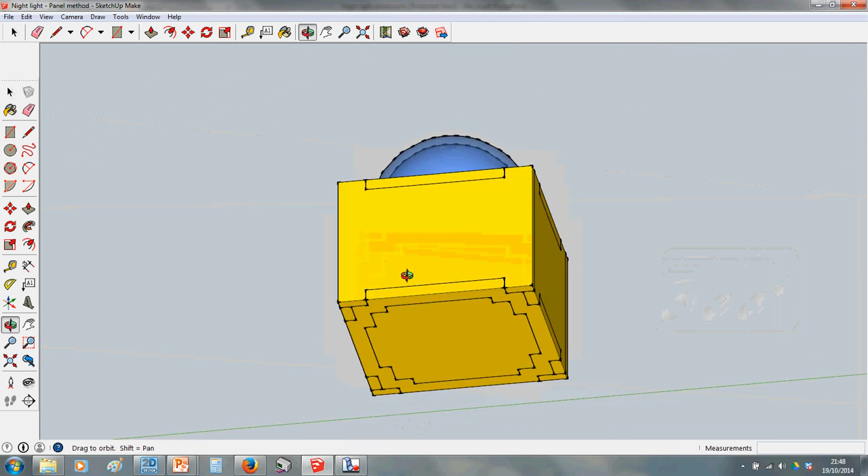Hello Year 9. This video is going to show you how to make the nightlight project in 3D in a program called Google Sketchup, which is quite easy to use for designing ideas in electronic products. It's not the most impressive bit of software and it can be a bit frustrating at times, but it's really good for doing simple ideas like this and getting your point across.

So anyway, we're going to build this, and if you can build everything that I've done on this model, you'll get an A grade for this assignment.

So I'm expecting basically each panel to be made separately, so your sides, the top panel, the dome. I'm expecting it to have LEDs inside. It should be that detailed that you can, for instance, just temporarily remove the side panel, and I should be able to see inside and check that a battery and a standard circuit board and LEDs will all fit in there. You've got holes for the LEDs.

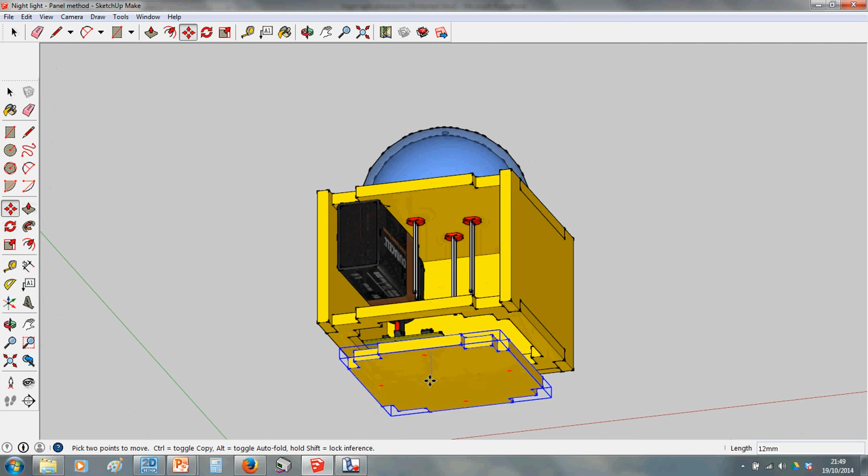Things like this panel here, which is the base, you should be able to remove it so you can imagine what it would look like and prove that you've got enough access space. So it really is a proper model. You can see all the little notches where all the panels are going to slot together for extra strength. This is what we're building.

Okay, so if you can do all of that, take the screenshots and put it on a page and hand it in. If you've done everything, you'll get an A star for it. Easy. Okay, your first job, you're going to need to go and load up a file to help you.

It's this PowerPoint here. Now you'll find that on the student drive. I'm at home recording this, but student drive is M drive. So if you look at what my mouse is pointing at, go M drive, Tech, then Mr Winter, then Year 9 Electronics, Year 9 Nightlight Project, 3D CAD lessons, and then load up this one called Nightlight Dimensions, which will give you a PowerPoint that looks like that.

Okay, this has got all the sizes of all the parts on it, and I'm going to be referring to this when I make the model, so make sure you've got this loaded. It'll make your life easier.

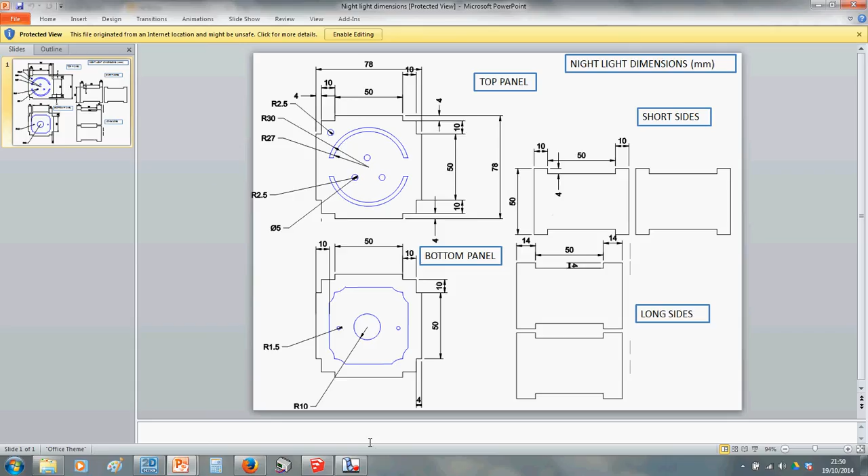Okay, I've just got to pause the video because my dinner's finished cooking, and I'll be back in what appears like no time whatsoever.

Alright then, yeah, had my dinner.

So you need to load up Google Sketchup first, and you'll find that it has an icon that looks a bit like this. It might not say 2014, and your version at school might be slightly different, but it's basically the same. It hasn't changed a lot. So load up the program.

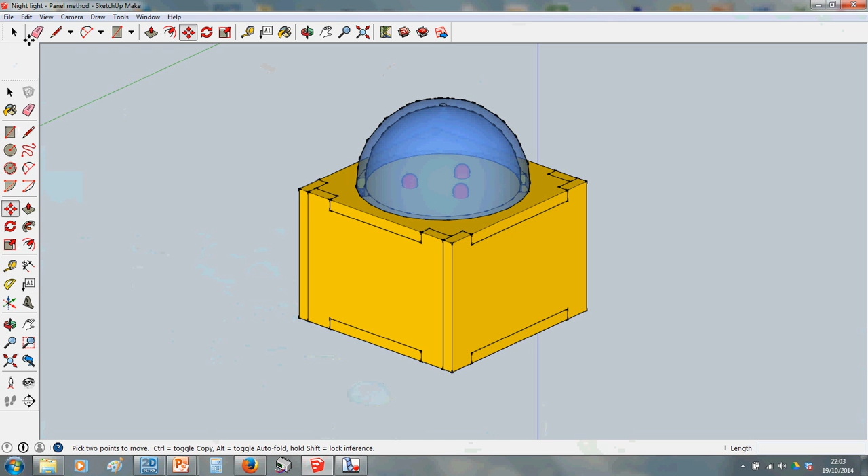I'm just going to close this down so I can load it again and show you, because you've got to set up something in a particular way. So when you load it, you should get a screen similar to this. Click Start using SketchUp.

And actually on yours, if it's the first time you've done it, you'll need to choose a template. So rather than click Start, go to Template, click the little arrow, and choose Architectural Design Millimeters, anything that's got millimeters in the title. Just don't choose feet and inches or meters. Make sure that's your template and click Start using.

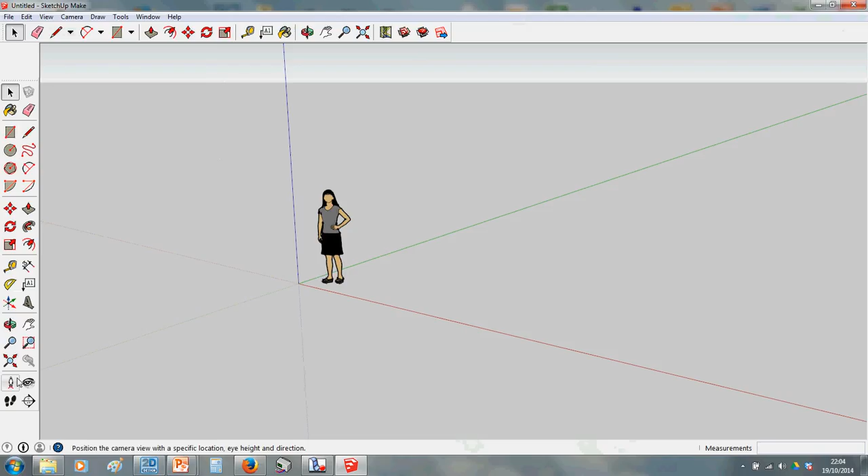Right, yours will look a little bit different to mine. Yours will not have the large tool set, so you need to go and get that first. So you go View, Toolbars, and just tick Large Tool Set. There's a few tools on there that we're going to use today that aren't always there.

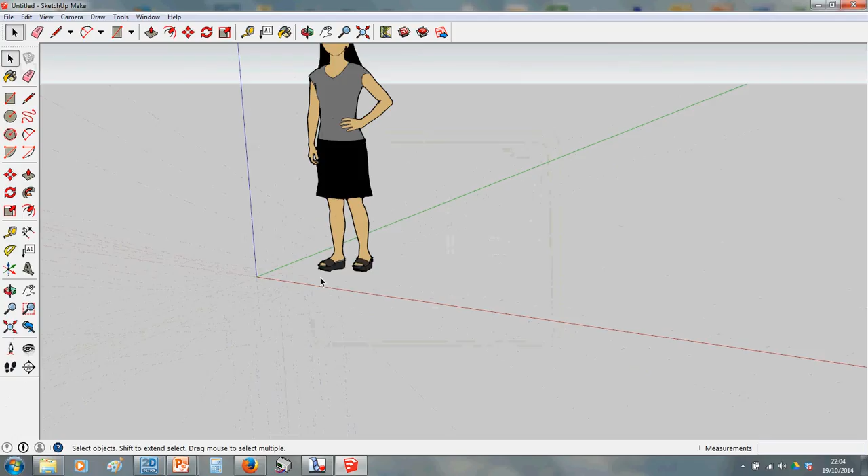Right, everything here is to scale. So this two-dimensional woman is supposed to represent an actual size human being. So obviously when we draw our nightlight, it should be quite small compared to her. It should be the size of, sort of, fit in a hand kind of size. Anyway, I'm going to delete that woman because she's annoying.

So all I did was use the arrow tool, click her, and press delete on your keyboard, and she's gone. We're going to start by drawing, let's start by making the top panel, okay? And I'll show you the cleverness of SketchUp here.

Our top panel measures 78 by 78 square, if we look at our dimensions. I'm going to draw that to start with, and I'll put in the little notches in a minute. So get your square tool.

We're going to try and draw it flat, on the plane that is the red and green axis. If you look in the bottom right, you'll see the dimensions. You could spend ages trying to get them both to say 78, 78, or it's easier to just type 78, comma, 78, and hit enter, and that will draw you an actual size box. Now you'll need to zoom in.

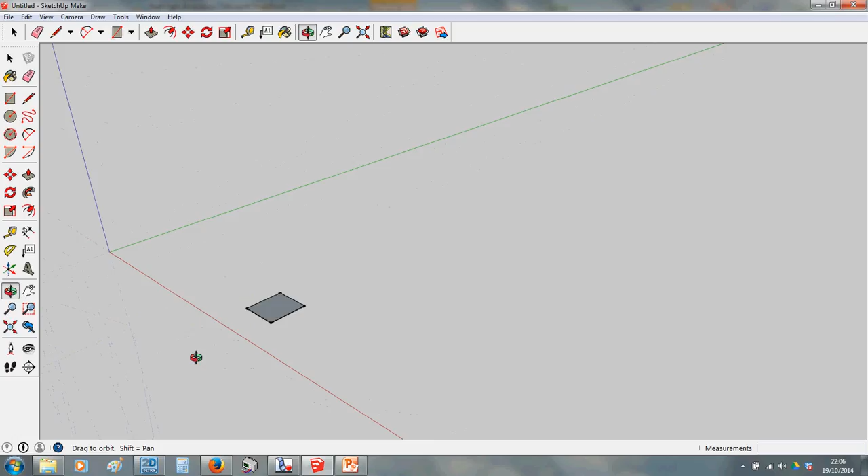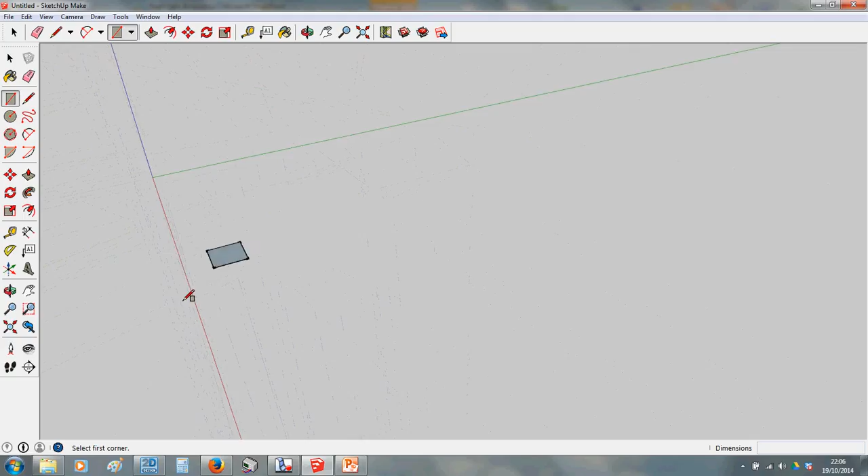To zoom in, scroll the middle wheel on your mouse button, like so. A few pointers on how to maneuver around: if you click the middle mouse button in and hold it, you can rotate around in 3D like I'm doing here. If while you do that you hold shift, you can pan, dragging your view left and right. You can rotate, pan and zoom in and out until you've got everything you need. If you accidentally lose your work, there's a zoom extents tool over here - click that and it will zoom straight back in so whatever you've drawn fills up the entire view.

Okay, I'll show you the rest of it. The next thing we're going to do is make this three-dimensional. It doesn't show you very obviously here, but the plywood we use is 4mm thick, so every panel we make - all six of these - is going to be 4mm deep.

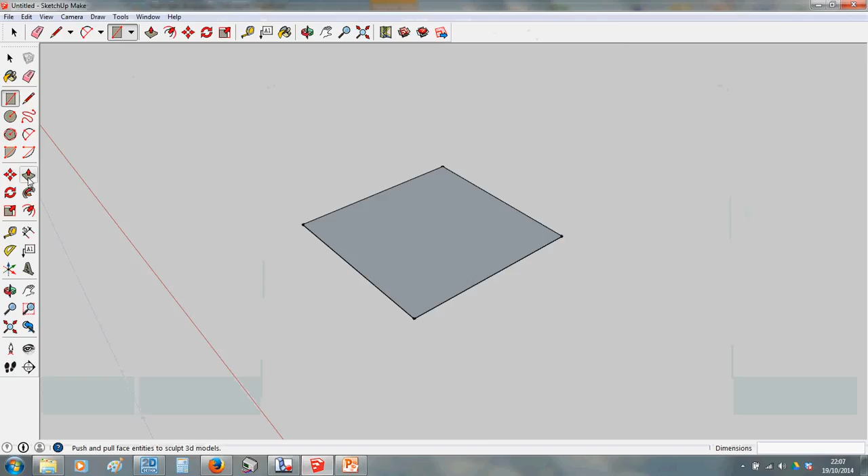This is where a very clever tool in SketchUp comes in - it's called Push/Pull. It's up here too, just duplicated. Select that tool and click and drag up - you can see we turn this box 3D. We can drag upwards or downwards and see our distance down here. We want it 4, so let go of your mouse, type 4 on the keyboard, and hit enter, and that will make you your first panel.

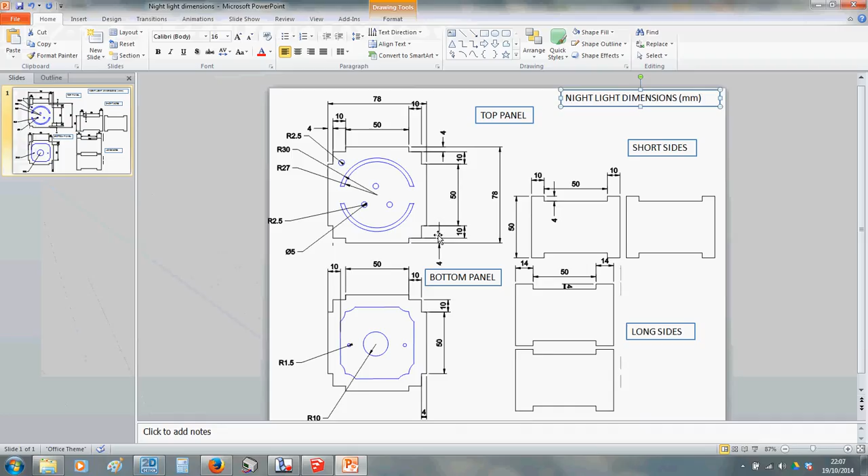Now we've got to put in all these other bits. We've got some cutouts - 4mm here and then another 10, so we've got a rectangle that's effectively 14 deep by 4 thick. I'm going to try and draw these onto the model now, starting with my rectangle tool.

I'm going to start from here. You can see these little blobs that appear to show you when you're on the corner. Click, and I'll draw out a rectangle - it needs to be 14 by 4. Hit enter, and we've drawn that.

I'm going to do the same from every corner now - one going this way, 14 by 4, making sure they're pointing the same way. That one coming in, 14 by 4, and the same here. Just draw them a bit bigger than you need, then type in your dimensions, 14 by 4.

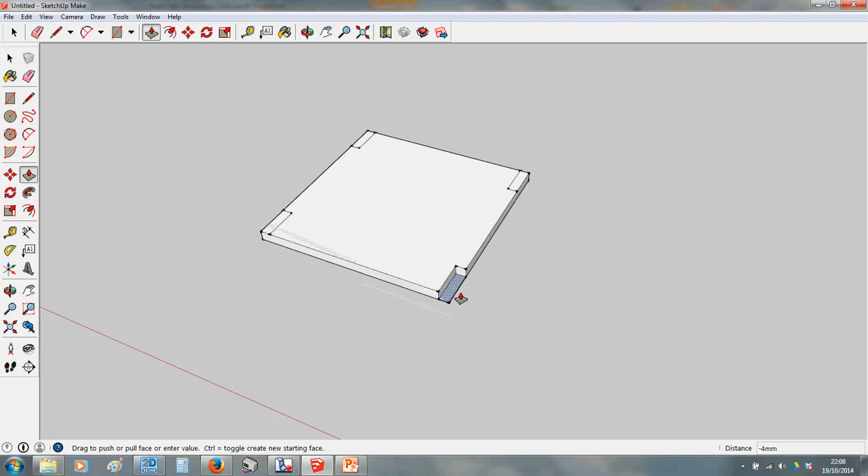Another clever use of SketchUp: if we get our push-pull tool, we can take that bit and pull it down, and if you pull so your mouse moves to the very bottom edge and let go, it will wipe out that bit entirely. Do it again for each corner.

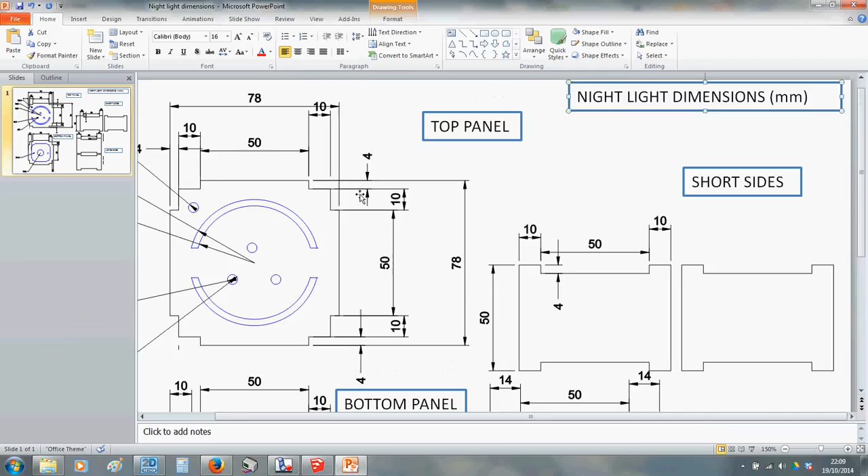So we've made that cutout here, but we've now got a smaller cutout of 10mm next to it. Basically we've got this whole corner - it should be 14 by 14, but 4 thick. I hope that's not too confusing for you.

Now I'm going to make a rectangle from here in - make sure you're drawing it on the top. Notice, if you're looking from the side, the rectangles sometimes get drawn sideways or other odd ways, so adjust your view so you're looking top down. Make sure your rectangle is appearing how you imagine, and we want it 10 by 4.

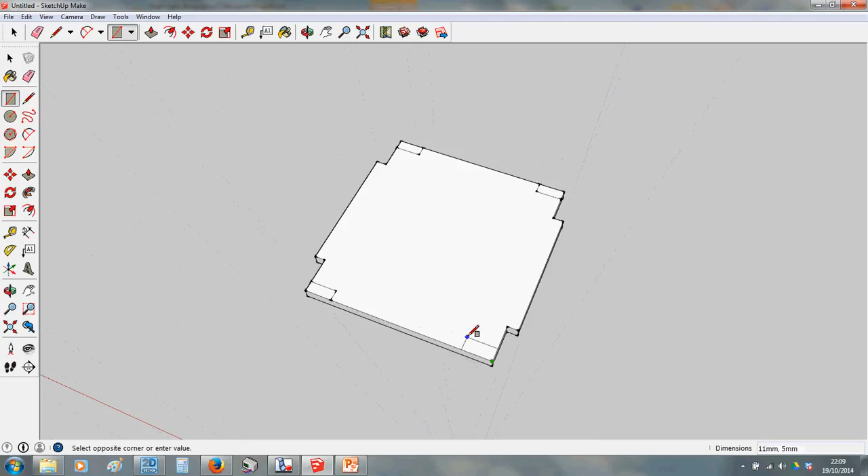Same this way, 10 by 4, and then... the good news is this first panel is probably the most complicated one, apart from the dome, but we won't talk about that yet.

Right, now you've got to get rid of these bits, so pull tool, pull that down, there we go, and do that. Good. Right, so this is starting to look a bit like a 3D version of this.

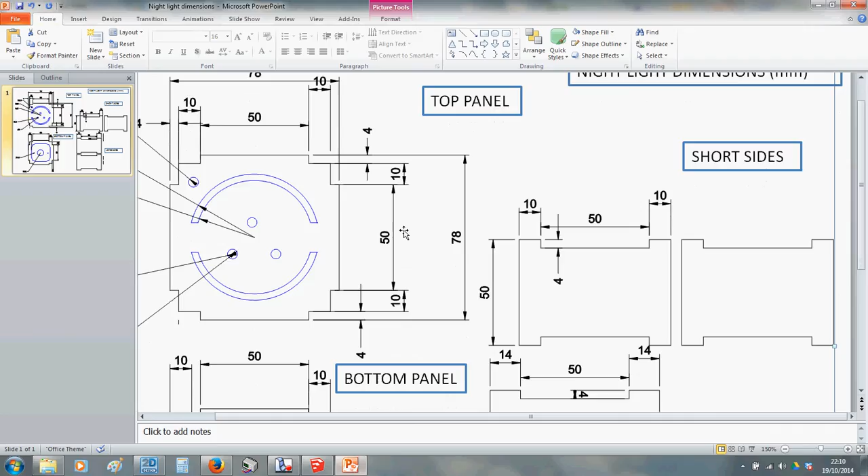Before we carry on, we're going to make this circular bit with these cutouts in it, and these holes for the LEDs and the light dependent resistor that we're going to put in. So I've done these by radius: a circle with a radius of 30 and a circle with a radius of 27. We're going to make this big circle here and then cut these bits out afterwards. So follow my method for this.

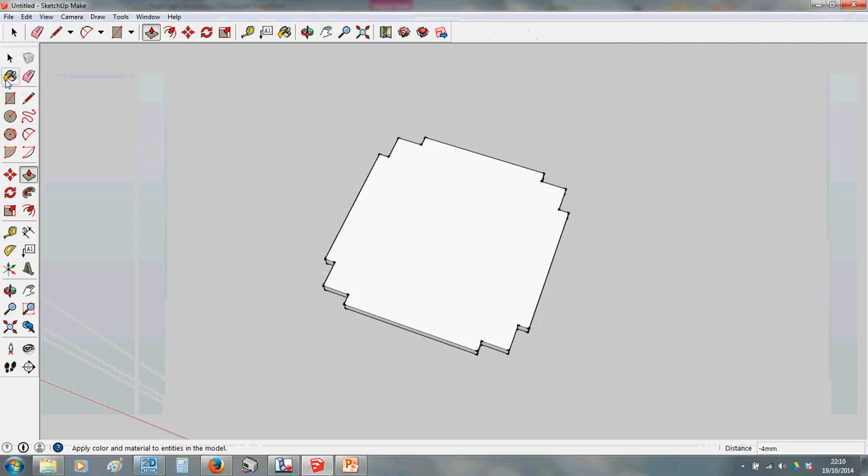We need to draw those circles lined up with the center of this, so we've got to find the center somehow. The easiest way is to get your line tool and draw a line from one corner to the other, and from that corner to the other, and where those lines cross, you should know from maths, that's the center of your square.

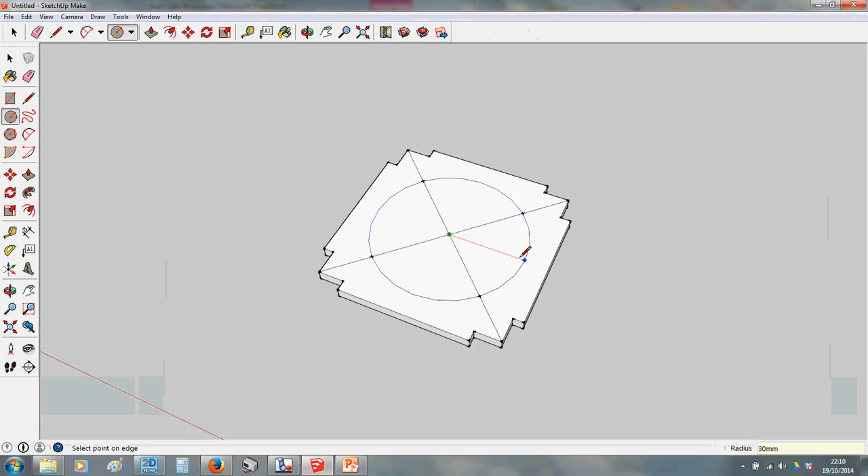Go and get your circle tool, make sure you're in the middle, click, and we wanted this to be 30 radius, so type 30 and hit enter, then draw another circle, type 27 and hit enter. So you should have that pattern now.

Okay, you can now get rid of some of these lines you don't need. For instance, these lines we used to find the center are no longer needed.

If you make a mistake like that, by the way, like I've done—I've chopped the top out—just do Edit, Undo, or Control Z on the keyboard. So to show you that, Control Z undoes it. Always get used to using undo if you make a mistake rather than just carrying on and trying to fix it later, because you only make more work for yourself.

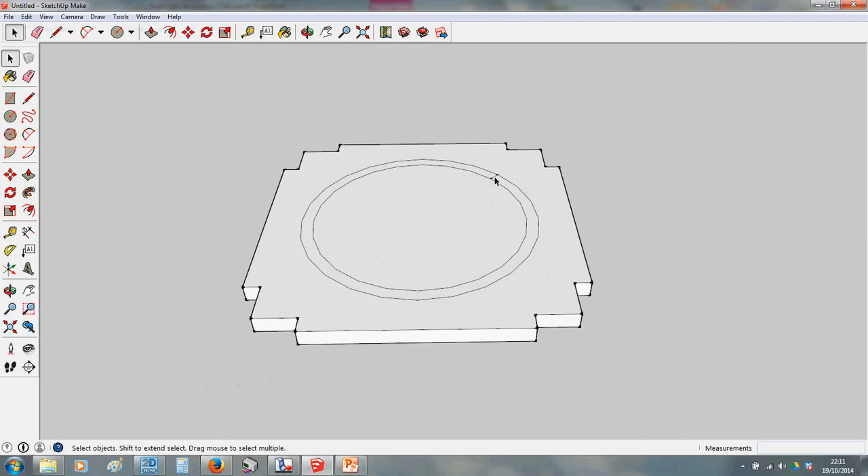Right, so we got that. We've got to now put in a kind of gap here. Now I haven't actually put any dimensions on this, I'm going to say go with maybe 10 millimeters. So this is going to be a bit ad-libbed.

I'm just going to get the line tool and try and make it even. So what I'm going to do is move down here along this side until the little blue blob appears—that means I'm in the middle. So I've got my line.

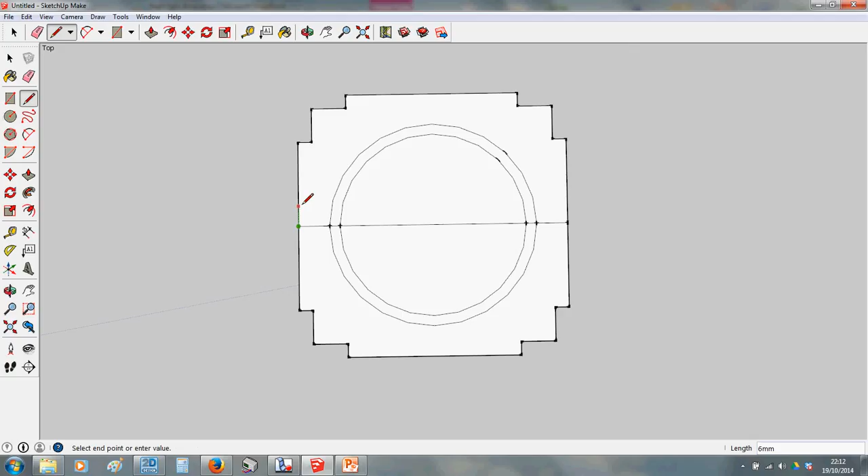Using my line tool, I'm going to make a line and move upwards and make it 5, hit enter. You see I've got a little blob appeared here, and draw all the way across. Then I'm going to do the same coming down—come down 5, there's my blob, draw all the way across, and now I've got my guidelines.

So I've now got to get rid of bits tactfully. Get my arrow tool, and I want to get rid of these lines here. Make sure you're picking the line, by the way, not the face, when you click delete.

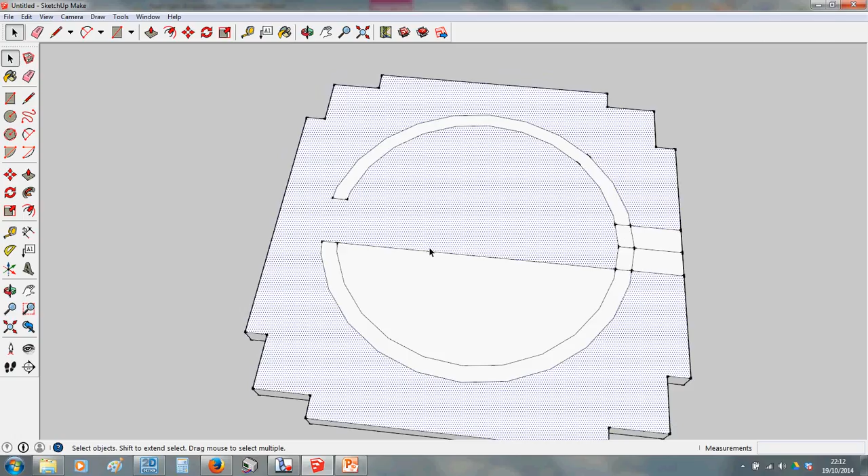This is a bit time consuming, and this is one of the annoying bits of this program. It can be quick for some things and then really frustratingly slow for others. Okay, and then get rid of the extra lines you need.

Brilliant. Right, we want to make those a hole, so that's where the pull tool comes in. You're going to pull downwards. Now you can type -4 if you want and hit enter. Actually that didn't work—you can pull down and just type, or do what I did there: basically pull it down, but then, I know it seems counterintuitive, drag your mouse out sideways until you pick up the edge of the work, and that will pull that face down to the edge, and in doing so will make a hole.

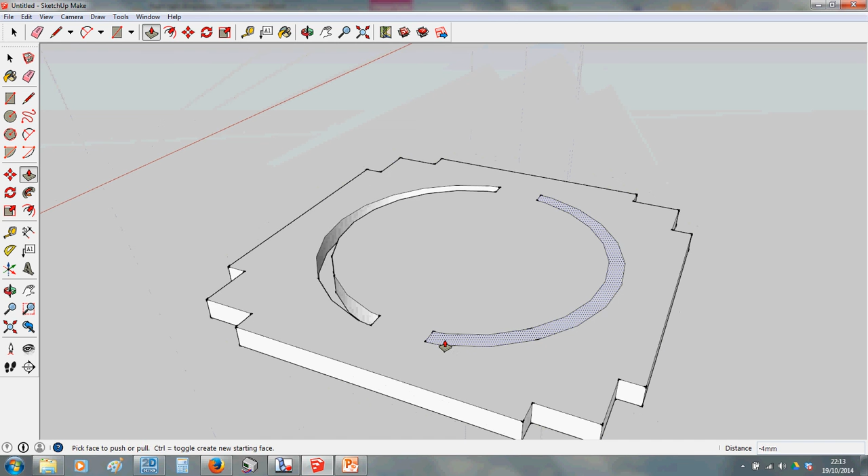Okay, so do the same with this one—pull it down to the bottom edge of the work, and you've made that there. All that's left to do now is you've got 1, 2, 3 holes for your LEDs. I'm not too bothered about how these are spaced because it's up to you so long as they're within the dome, but they are 5mm diameter or 2.5 radius, and then you've got another 2.5 radius hole on the outside, which is for the light dependent resistor, which is going to detect when it's light or dark.

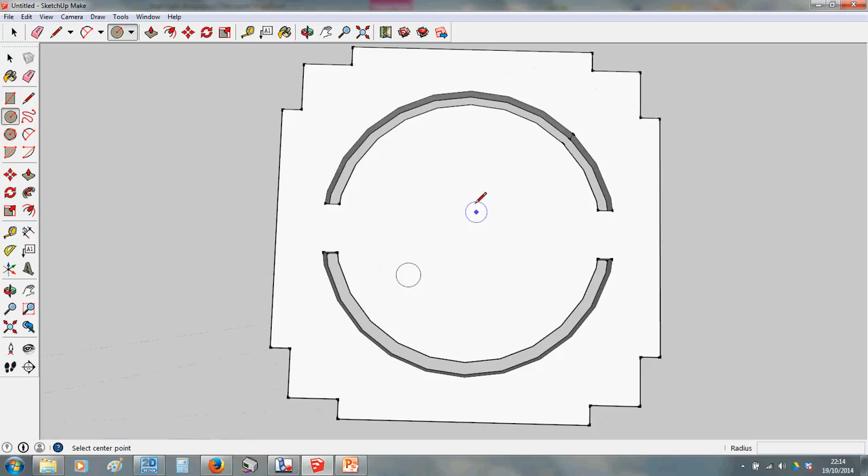No prizes for guessing. Circle tool, click, radius we wanted was 2.5. Let's put one there, I'll try and do it as triangular as I can. 2.5, same again, 2.5, and then another one on the corner here, 2.5. Right, we've got to make all of those holes now, so pull tool, okay, and again pull them down

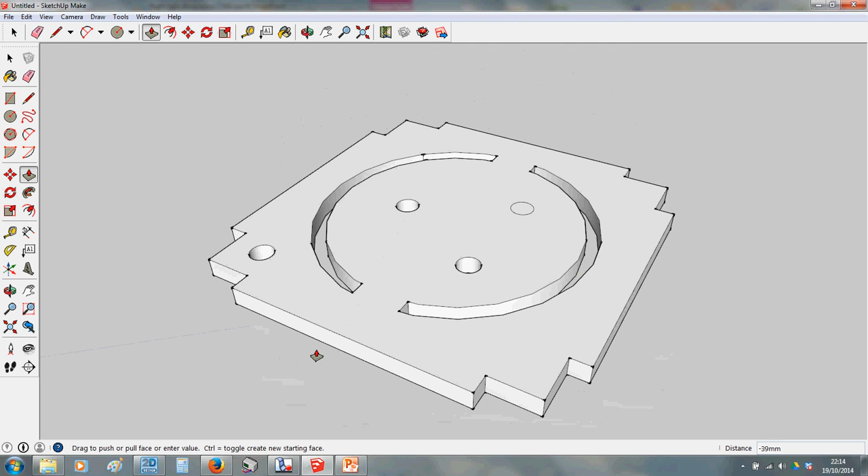To the edge. When you get used to how this pull tool works, it's really powerful. Right, we've made our first panel, if you like. So feel free to have a look around, just check there's no mistakes, no bits missing.

If you were worried about any of the sizes, by the way, and you thought you might have got something wrong, over here is this dimension tool. If you click on an edge and on another edge and pull out, it tells you how big that is. So that's 50. We can check from here to here, for instance, is 10. From here to here, we can confirm is 4. 4, 10, 50. Let's have a look at our plan. 4, 10, 50. Yeah, I know what I'm doing, so of course it's spot on.

Right, delete those dimensions afterwards, by the way, just use them to help you. Right, that panel is finished.

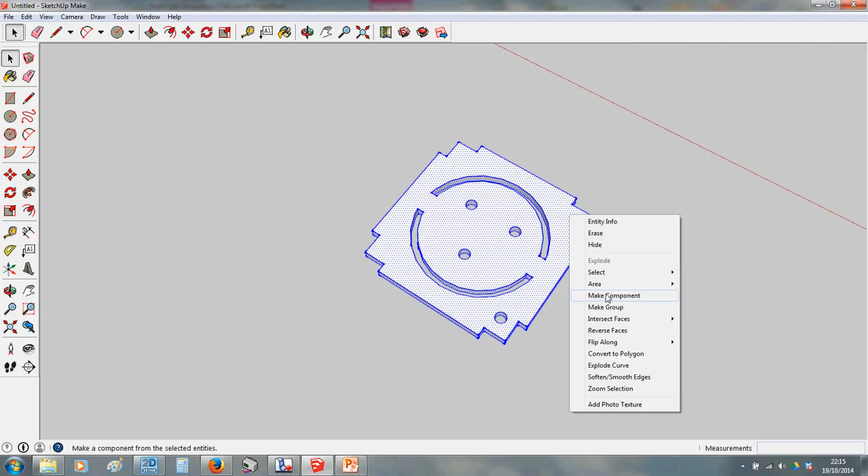So I'm going to do what's called make it a component now. I'm going to get my arrow tool, drag a box around the entire thing, right click on it, right mouse button, and click make components. Okay, so call it what it is, top panel. Okay, and there we go.

Now your next job is to make the side panels, and then we'll make the bottom. We can actually copy and paste this later and use it to make the bottom, because when you look at this you'll see the bottom is essentially the same size, it's just got a different shape in the middle.

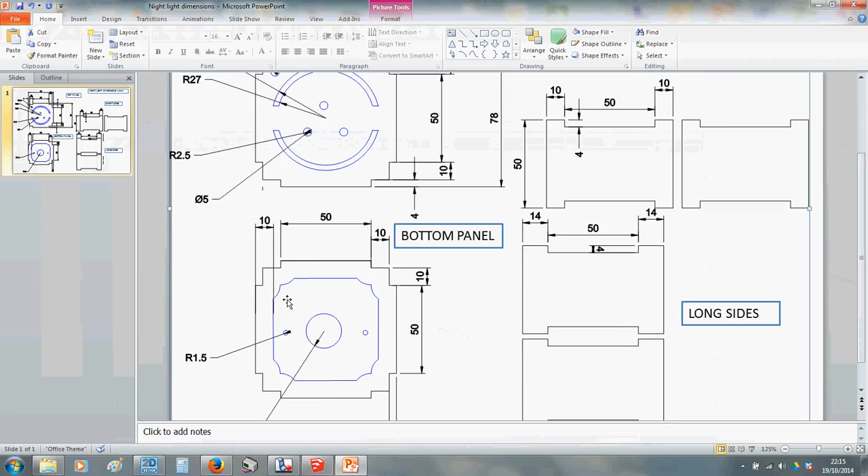So we're going to make the long side, well, let's make the short side panels now. So these are 10 by 50 by 10, and 50 high overall, and they fit, if you can imagine these little teeth here, fit into this little 10mm slot there and there. Okay, so I'm going to make a 10 by 50 by 10 and by 50 high.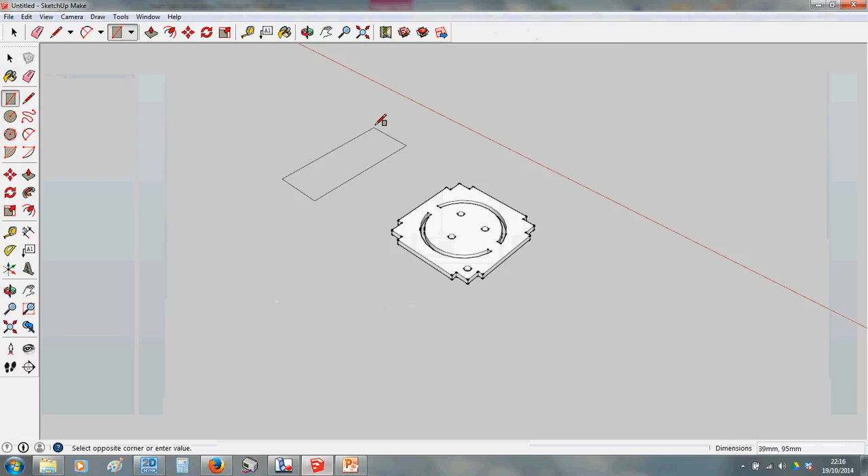So rectangle, 50, 70, and I'm going to pull that up with the pull tool, 4mm, and then I'll do this with the line tool this time. So it was along 10, down 4, along 50, must be up 4, and along 10.

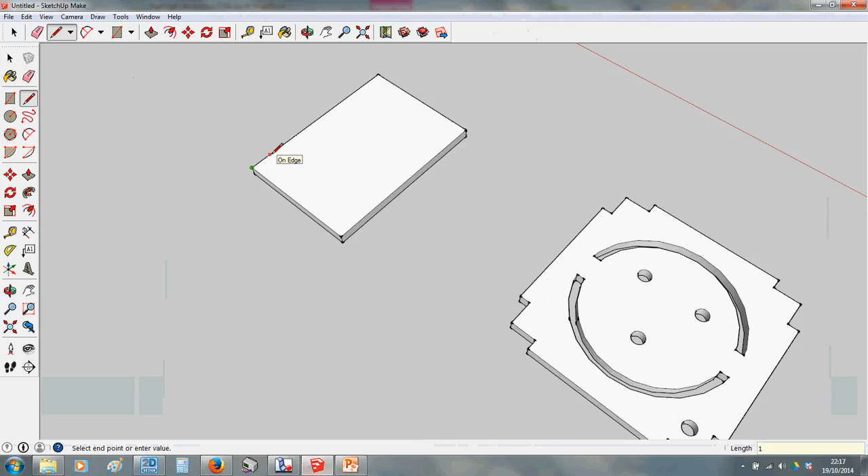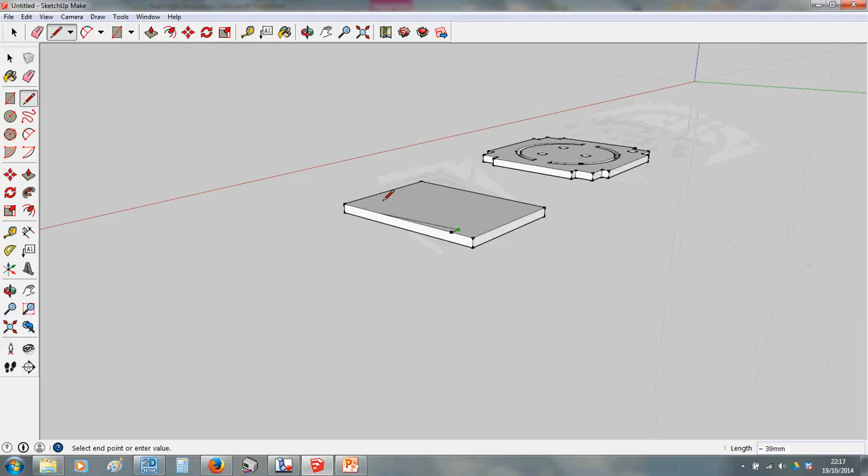That's the exact mirrored on the bottom. So with the line tool, starting from the edge, along 10, hit enter, there's the blob, this way. Notice by the way, it kind of, when it goes red, it's saying you're drawing it parallel to this red axis. Okay, so use the colours of the lines to help you. So we wanted to go 4 that way. This way it goes green, if you have a look, because back there's the green axis, so moving this way is green. Okay, anyway, so going this way 50, and then back in 4.

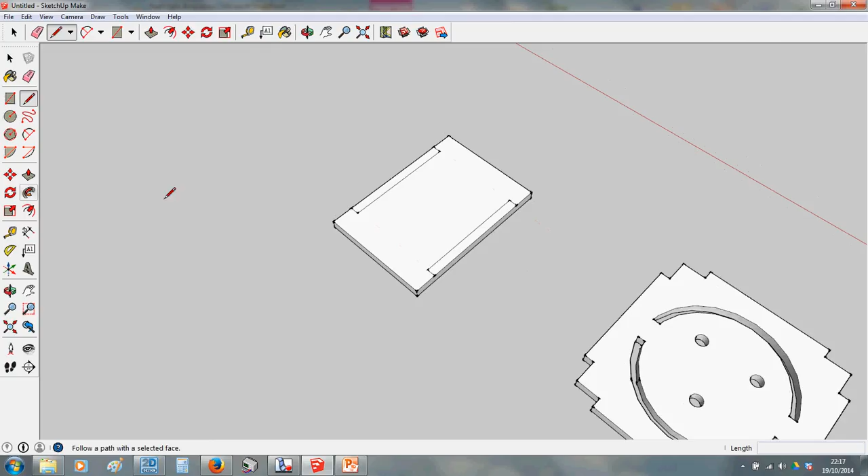And I'll do the same on the bottom, so it was along 10. You'll see it handily, it gives you nice little dotted lines like that to help you line it up. 4, from here to here, there you go. So sometimes you don't even have to type the dimensions, because if there's a mirrored part, it matches it for you. Okay, going to get rid of those bits, so we're going to pull that down to the bottom, pull that down to the bottom, and looking at the plan, that is it.

There's nothing more to that. There are 2 of these, so what we do now is make it a component. So again, drag a box around the whole thing, right click, make component. So this is shorter side, and I'm going to make 2 of them. So I'm going to select it and just do edit, copy, edit, paste.

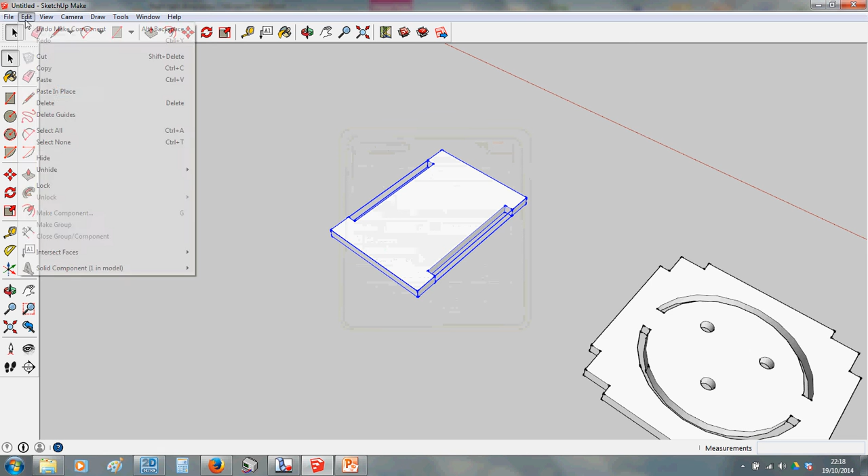Alright, we've got another one. Time for a bit of assembly now. We want to start gluing these together. Now this is where it can get a bit fiddly, you're going to be using a combination of the move tool and the rotate tool.

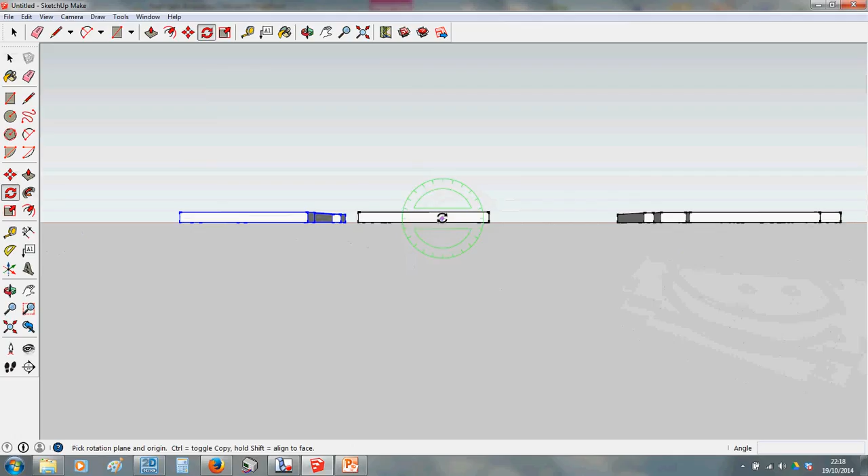The first thing we need to do is rotate this 90 degrees. Get the rotate tool, and we're going to look at it sideways on. Notice your thing should be going green. Choose the one you want to rotate first, get the rotate tool, click on the side, click again, and rotate. It kind of snaps to the normal angles, or you can just type 90 for 90 degrees and it will move it.

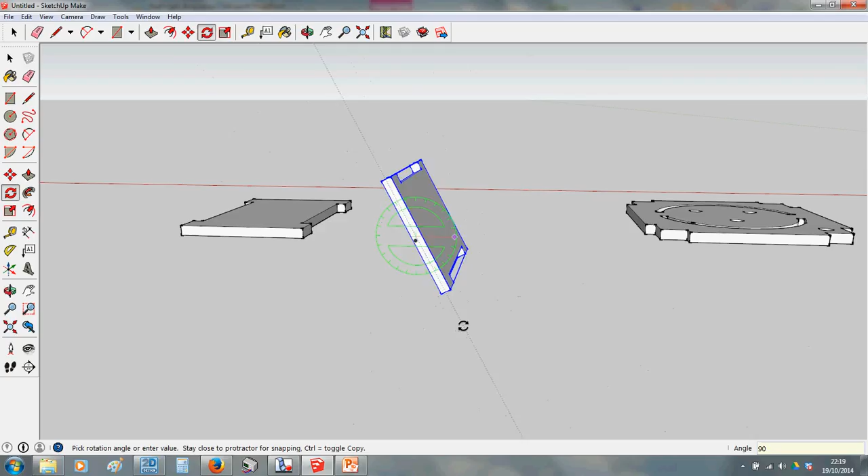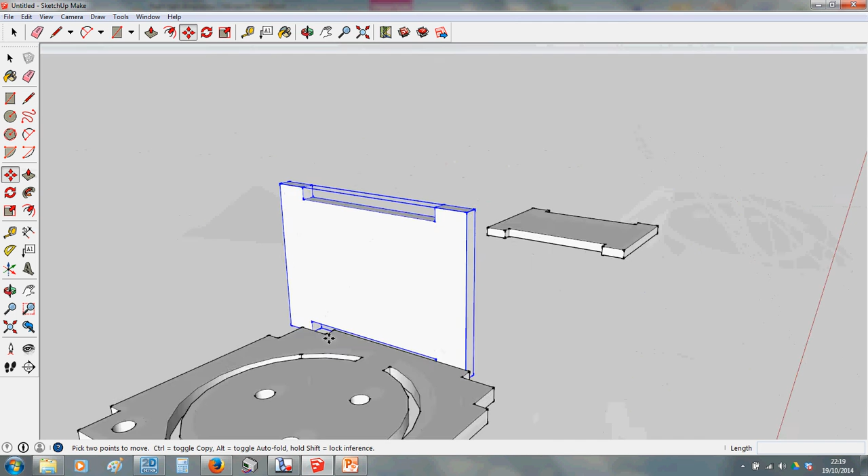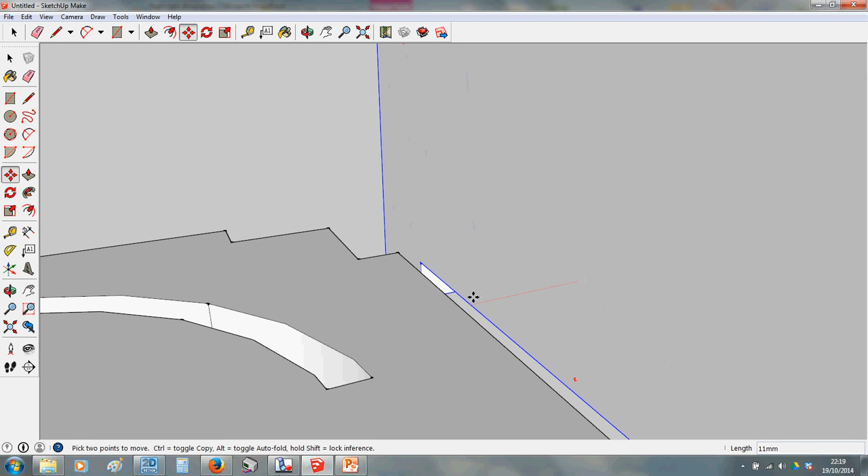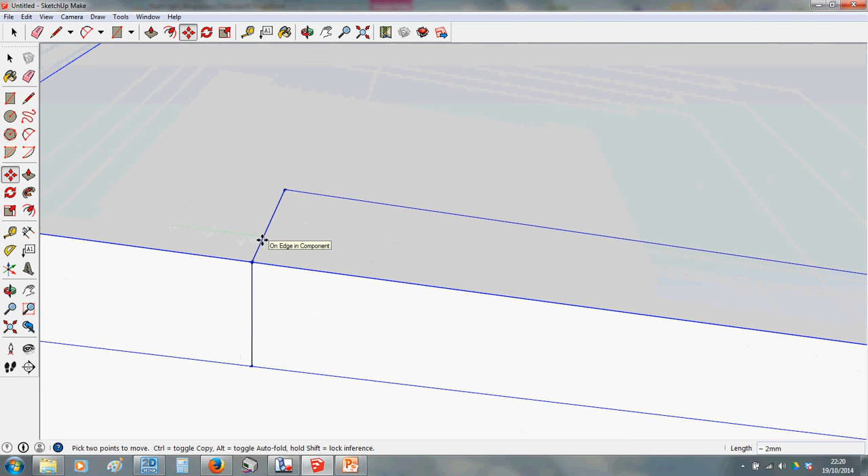That edge there, I don't know if you can make it out, there's a tiny little purple circle that will join to this purple one here. So if you click there and click when it goes purple on this line, it keeps those lines lined up. Likewise, this edge should actually line up with that edge, so click, drag it down, there we go. And now this edge, if we zoom in here I'll show you, this edge needs to line up with this edge, so just click and drag this way until it touches. Once you've done that in several directions, it should be joined together as you want.

My advice to you, when you've got them joined up as you expect, drag a box around the pair of them and right click and don't make them a component but make them a group. That way they're now locked together and they won't come apart by accident.

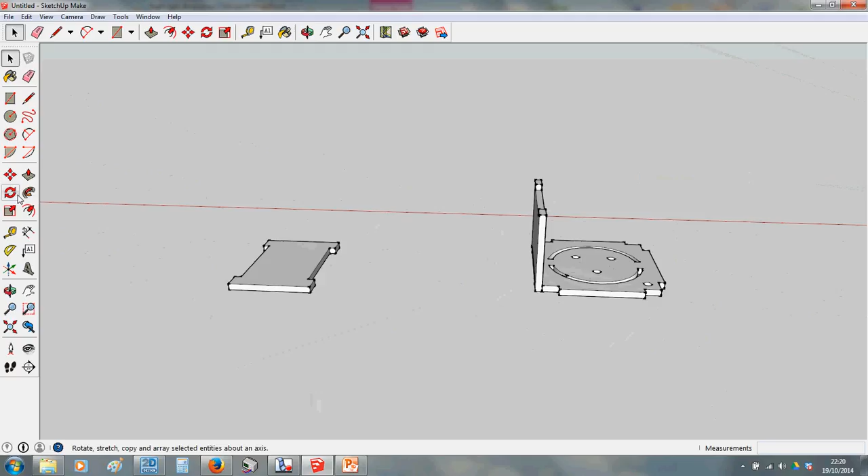Same method, we're going to rotate this and move this one. Choose it, rotate tool, make sure you've got the right colour, so we're rotating about that axis. I want to do 90 degrees, so I type 90. I'm going to move it with the move tool, so let's bring it into the right area. Look at it from above, get it roughly lined up, look at it from the side and move upwards. Alright, and then I realised that...

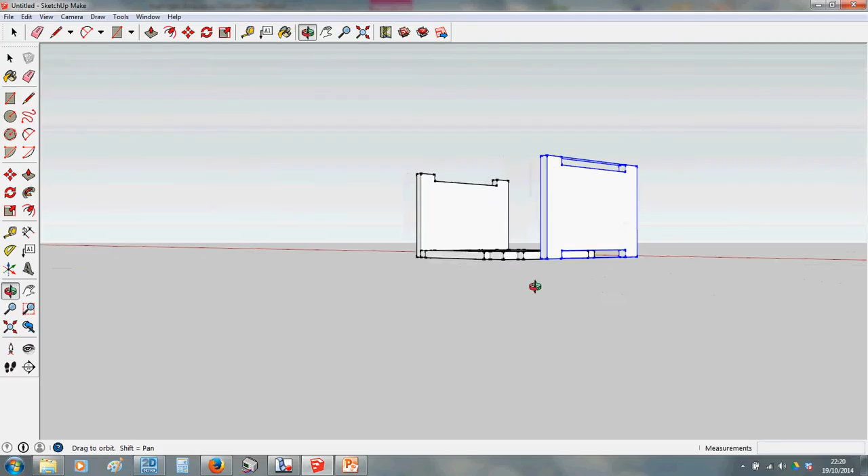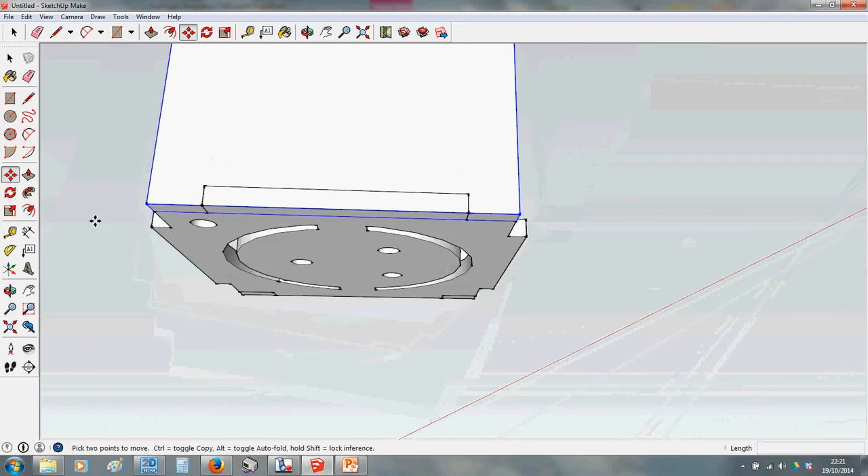So what we're saying is if we're moving, you see if you hover it says on face, and face should go to... it won't actually let me do it, maybe look underneath them. So that edge should be with this edge, and what do you know, I got it right first time. But if it wasn't, just drag it left to right as well, from edge to edge until it kind of snaps. It's got a certain level of intelligence, so it'll figure it out as you go.

Select all of that lot now, and now right click on it and make it a group.

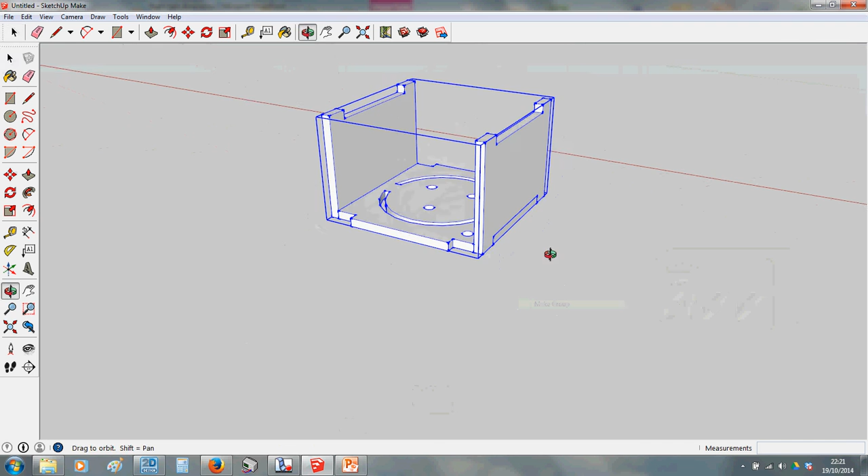Now we're ready to make the other two sides. It might be a good time now to rotate this whole thing 180 degrees because technically it's upside down. So I'm going to choose the whole thing, get my rotate tool. It doesn't really matter which way you do it from. I'm going to choose it here, click, and I want to do a 180.

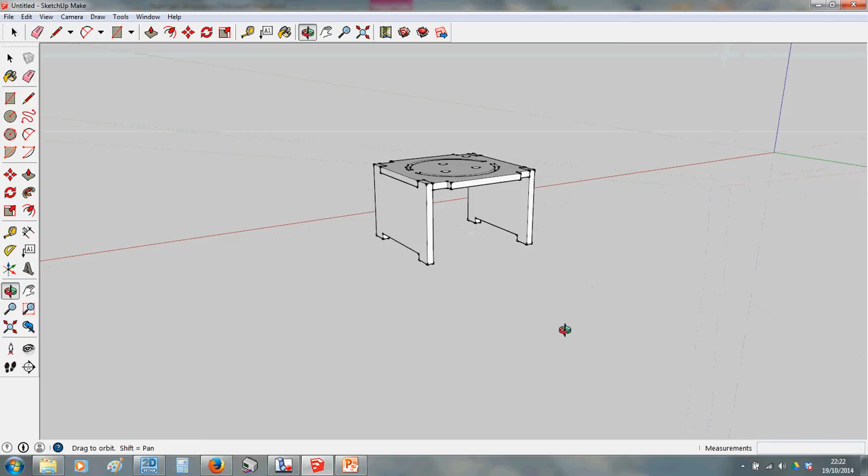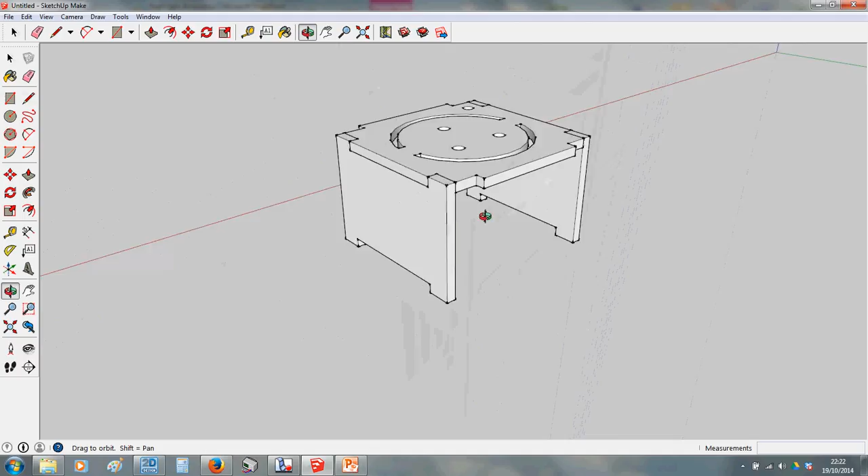Good, right, we can make the shorter sides now. Well, actually these are the longer sides. You could spend ages making them and then moving them into place, or you could get clever and try and do them in situ, which is what I'm going to try and do now. So I'm going to make one of them, and do that as follows. Actually, do you know what? No, I'm going to do it the hard way. I'm going to make them separately because I'm only going to confuse you otherwise.

So we've got to make the longer ones 14 plus 50 plus 14, so that's 14 plus 14 is 28 plus 50 is 78. And I'm assuming they're the same size as these, so they're 78 by 50 rather than 70 by 50. And the notches are 14 mil.

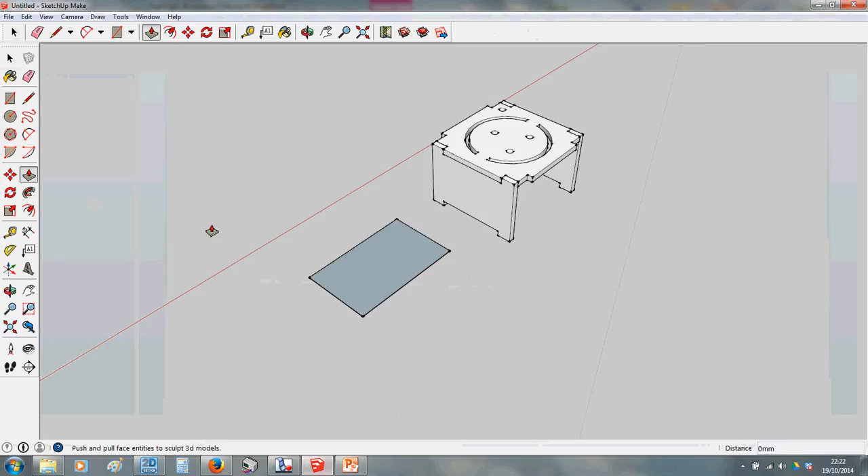Okay, so same method, draw it out. So we wanted 78, 50. Make it 4 mil big with a pull tool, so pull it up 4, hit enter. Then we want to put the little teeth on them, and the teeth were 14 big on this one. So drag that out, 14, 4.

Same here, 14, 4. You don't have to use the rectangle tool, you can use the line tool, so you could come along 14, up 4, and back to here. Okay, whatever you find easiest. The rectangle is just a bit quicker, so 14, 4.

Alright, now, have I done that right? Actually, it was the 50 mil bit that needed to go away, so I'm going to change my drawing now. I'm just going to draw a line across there. This is an easy way to fix this, a line across there, and then get rid of, which bit did I - right, so it's the 50 mil bit I want to remove. So I no longer need that line, so I'm just clicking them and pressing delete.

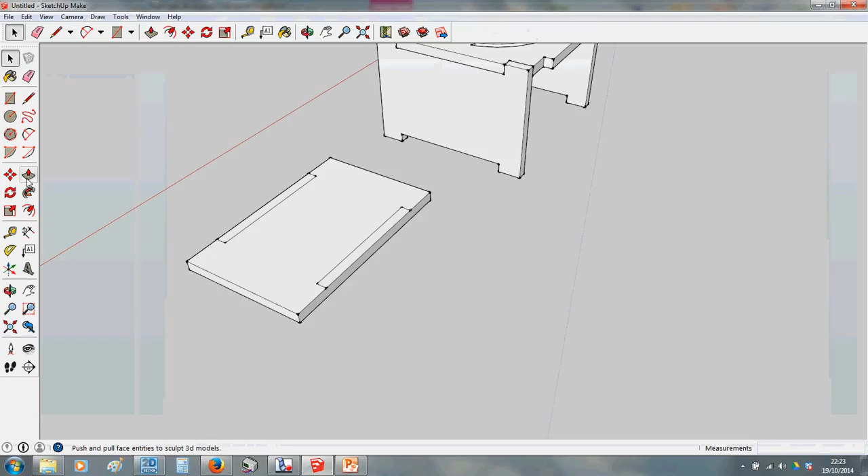I hope you're still following me. And then the push-pull tool, I'm going to pull that down to there, and then pull that down to there.

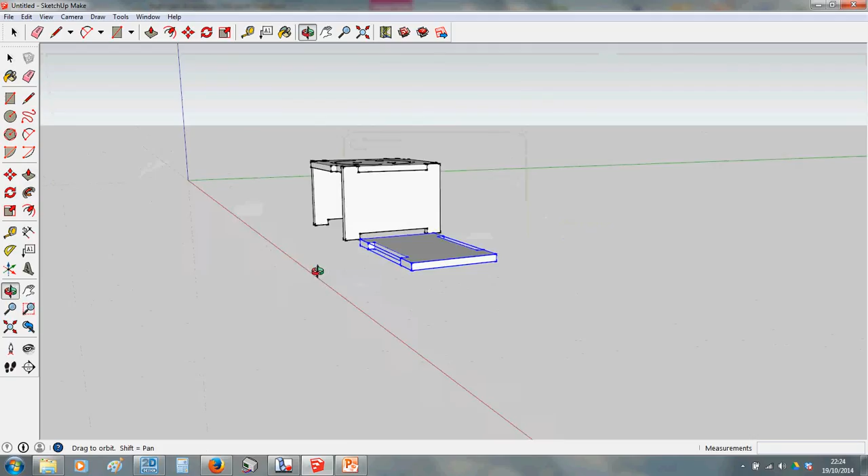What do we do once we've finished it? We drag a box around it, right click, make it a component. So this would be the longer sides. And then we just got to maneuver it into position. So rotate tool, we need to rotate this colour here, 90 degrees.

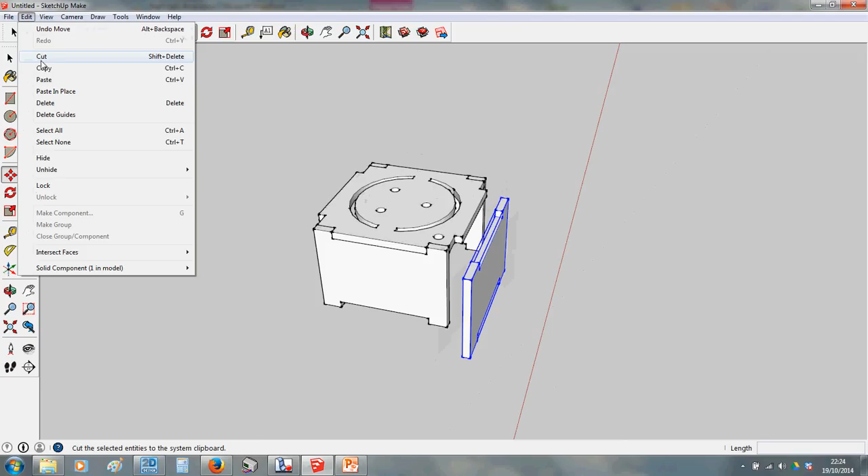We're going to move it, so let's move it roughly there. Okay, I need to get above it. It might be a good idea to copy and paste things when you've got them lined up better as well. So for instance, there is a bit closer, so if I do edit, copy, edit, paste, now you see my pasted one is the right way up, which just saves you a bit of time.

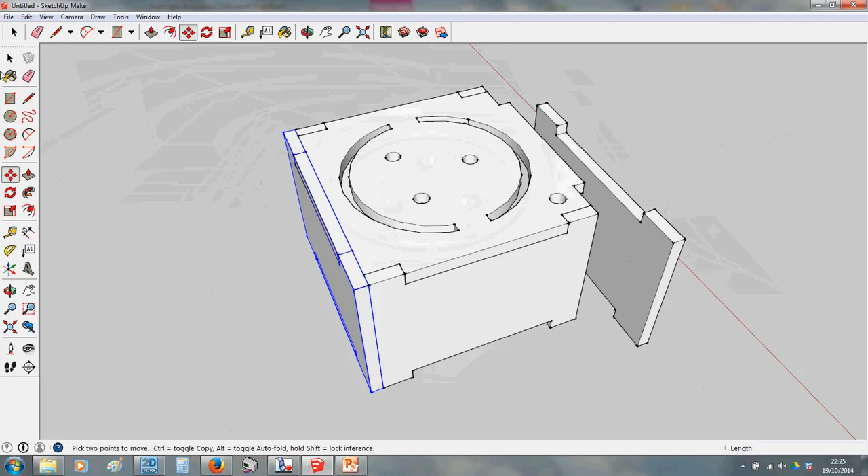Okay, so again, moving, so I'm going to move that - oh, I've got the wrong one selected, so that would be onto this edge, and that would be onto that corner. Okay, choose the other one, so you're going to move that onto that edge. Okay, so I'm using the little purple markers and that onto there.

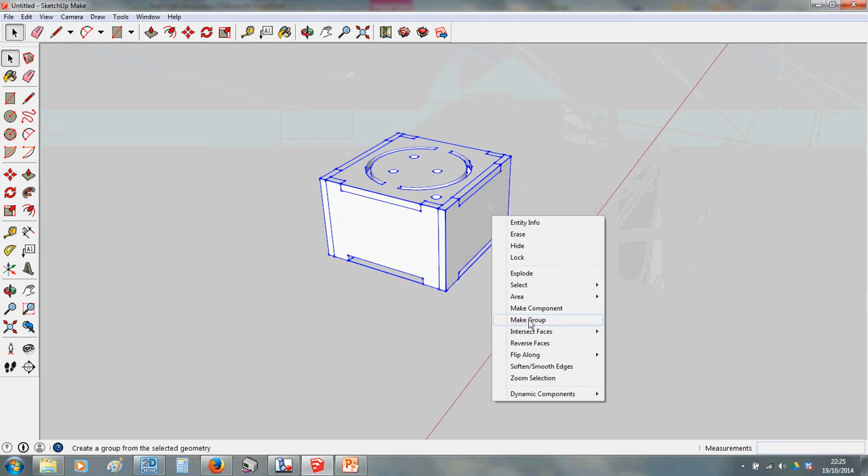Right, so I've built all the panels of my box, and I can now group them so they don't come unstuck. So drag a box around everything, right click and make it a group. Okay, I've just got to make the bottom panel now, and I'm going to draw the bottom panel in situ.

Now would be a good time to save your work. So alright, I'm not going to bother, but make sure you save it because it does have a habit of crashing sometimes. And right, to draw the bottom panel, I'm just going to use the geometry I've got here and then do it in situ.

So I'm going to use the line tool. I know my bottom's got to slot into all this, so I'm going to draw a line from here to here, and I'm basically going to trace the outline my bottom panel would take. And when I've drawn every single line, so be very methodical about it, you'll see it will pop into existence.

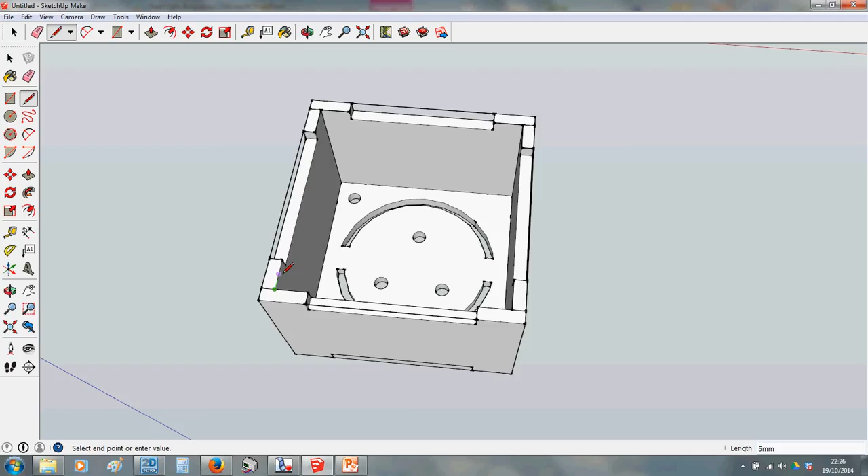So from here to here, from here to here, from here to here. There to there, there to there, and this should be the last one. There you go, you see when I made the last connection it just appeared.

Right, that's 4mm thick, so we're going to pull it. Now again, we could just pull it down to there, look. Or you could just type 4 if you want. Right, so that's that bottom panel made.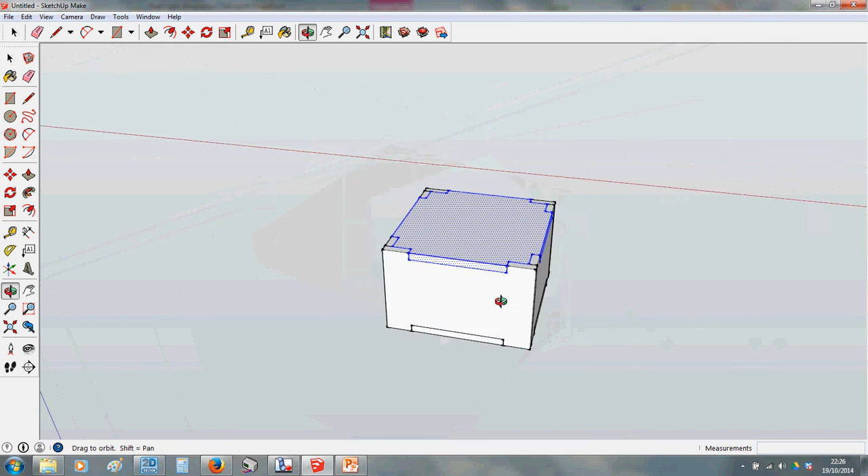Be a good time to drag a box around it. And if you grouped everything else, it won't get picked up in the selection, which is quite handy. Right click, make a component, so call this bottom panel. So can you see when you start to kind of build other shapes, everything else gets a bit easier. Just check that still moves. There we go, okay, so here's my bottom panel.

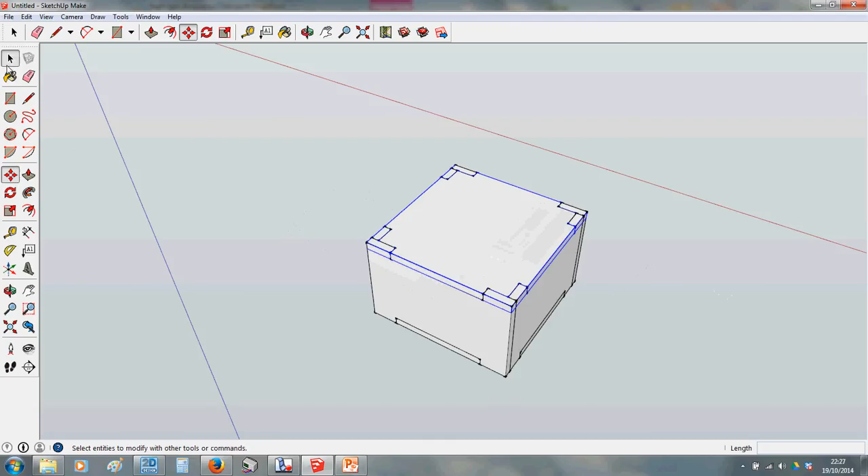I can move it around if I want to. I just did undo there. Right, I need to add in a few things now.

I've got to put in this kind of bordered area, which is basically, as it says here, look, 10mm away from the edge, and then a 10mm diameter circle, and a 10mm radius circle, and some 1.5mm radius circles for the screws that we're going to put in. This is going to be our battery access drawer. So we do that as follows.

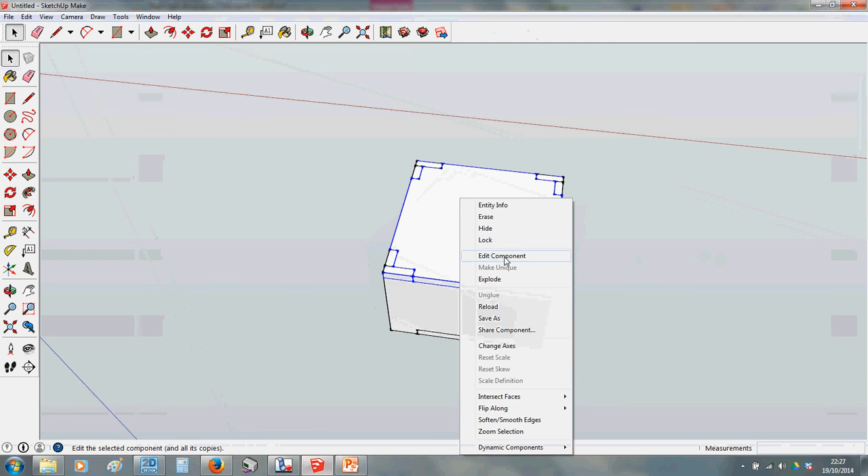Once you've made it a component, right click on it and choose edit component. Can you see it kind of isolates it and allows you to just tweak this one part.

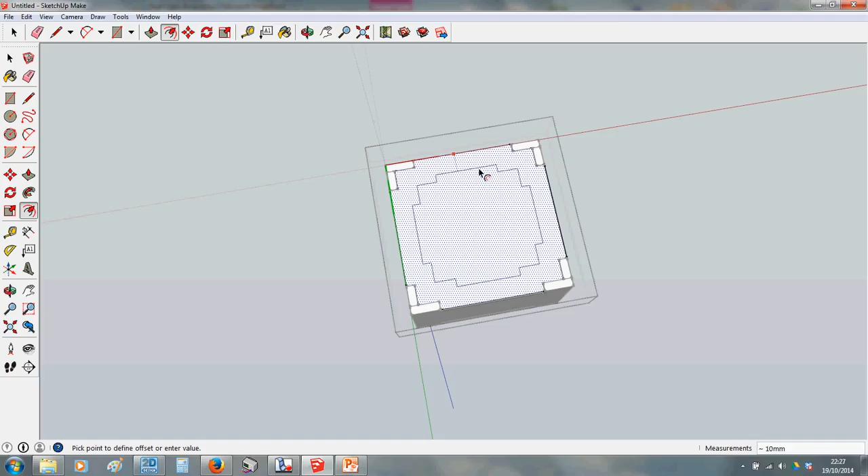I'd recommend using the offset tool now. Click just on the edge of this box, and you have to click twice. Now it gives you the ability to move inwards, look, and what it's doing is just tracing that shape. It's very useful, the offset tool just takes an outline and repeats it, but we wanted it 10mm away, so just hit 10 on your keyboard and hit enter.

That's obviously got to be removed, so you use the push-pull tool and pull that down. There you go, 4mm. Brilliant, that's your battery access panel.

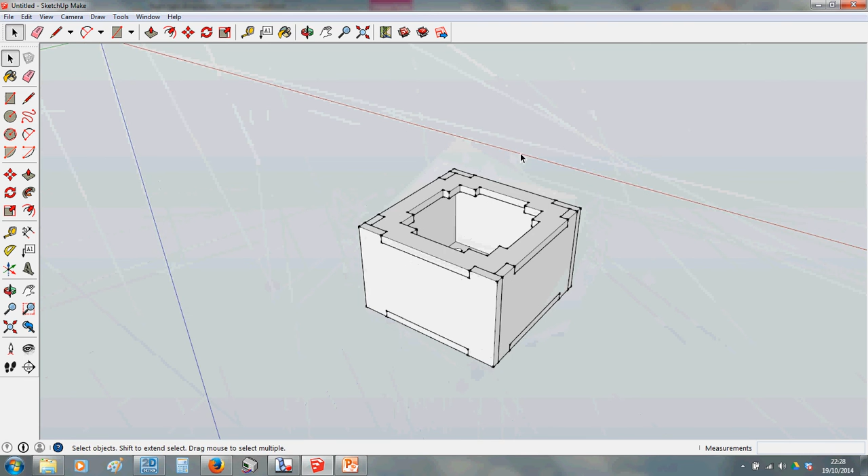You also need to make just the actual door separately, so again, same method as we made this bit here. Let's make all that a group now. So choose it, right click, make group, get your line tool, and you're going to trace all this outline again on the top, dot to dot, dot to dot.

We're actually going to make this panel removable, so the idea is although it will exist, we can pull it out of the way so we can have a look inside the box and just prove that you put your LEDs and battery in and stuff like that.

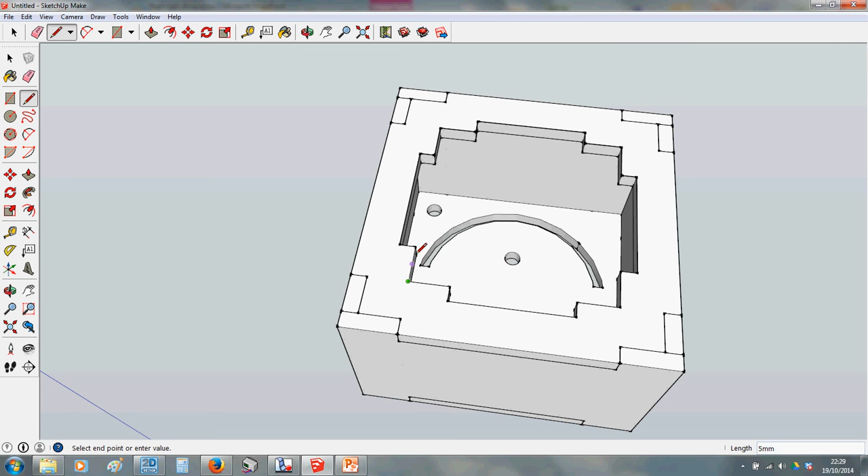There you go, as I said, when you make the last panel it magically appears. Alright, pull it up, I'm going to pull it upwards this time and hit 4, because that's the thickness of the wood. As usual, drag a box around everything, and if you grouped everything else, it'll only select this.

Right click, make it a component, so this is the battery door.

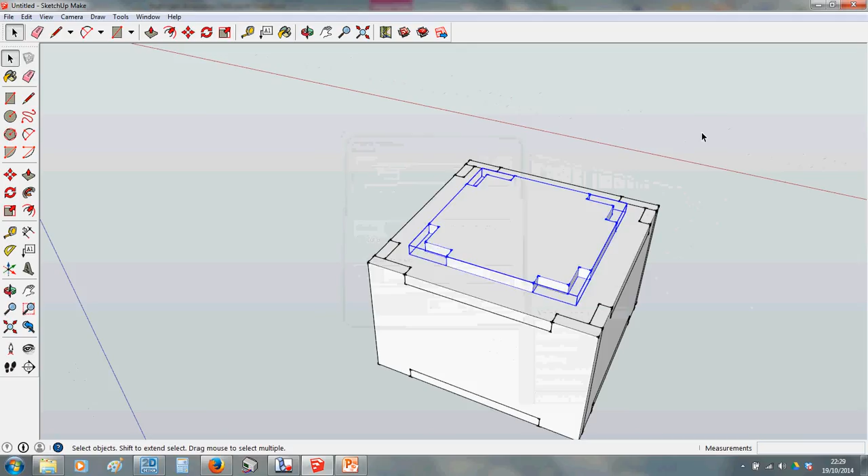Now I forgot to put in the circle and the 2 holes as shown here, so there's a 10mm radius circle and 2 holes of 1.5mm. I'm not too bothered about the positioning because you're going to drill them by hand anyway.

So again, we want to edit this component, so right click. How do we find the center of a rectangle? Well, we draw the diagonal lines, you should remember this from earlier.

Draw a circle which is 10mm radius, so hit 10, and I'm just going to draw a line across the midpoint and draw my smaller circles on there where it goes blue, and these were 1.5, and there we go, 1.5.

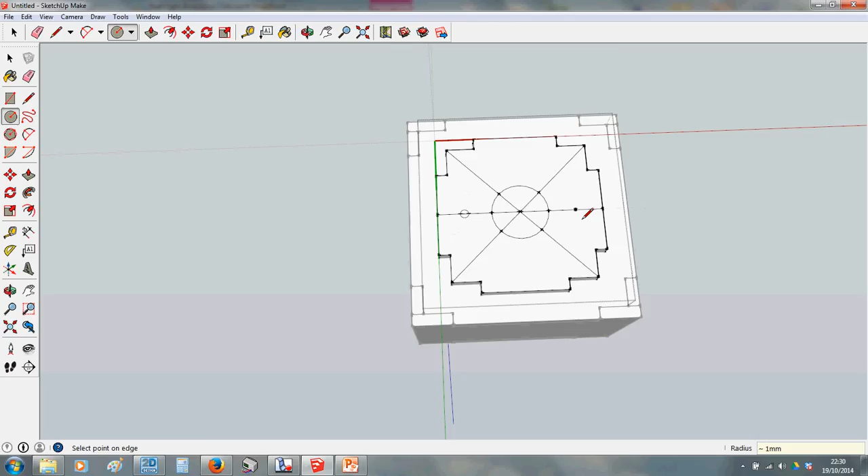Okay, delete all the things you don't need. This is the time consuming bit, to be honest.

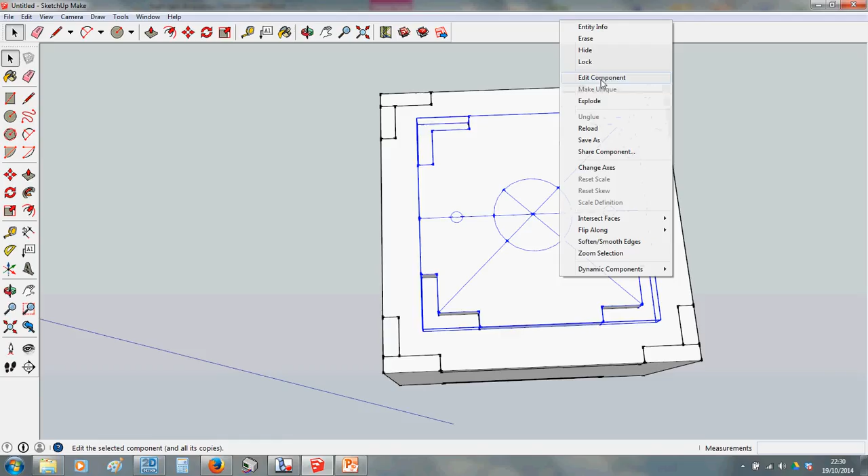Oh sorry, if it does that, you might have come out of edit mode, so go back to edit component if you need to, if you can't choose bits. There we go.

Remember Control Z if you make a mistake. Sometimes zooming in helps, I should follow my own advice really.

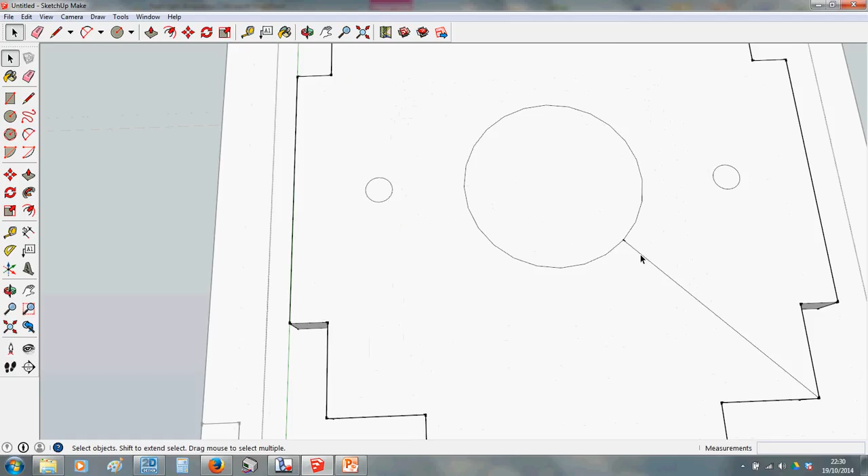Alright, and then pull them down into oblivion. There we go, so pull that down to this level. Same with that, remember I'm pulling to the edge so it knows where the bottom of the object is.

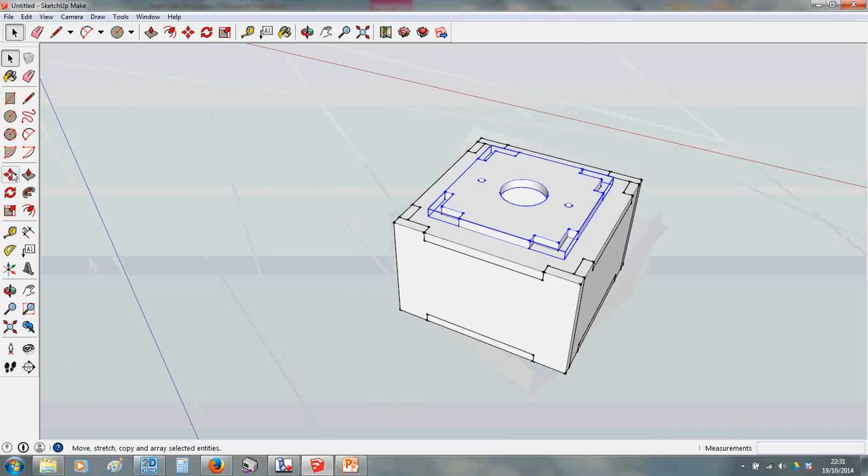Alright, so we're done with that, so we can right click, close components, and you can now see that that's a part on its own. And if you get your move tool, just move that up out of the way. Try to move not left or right, but just, you see when the blue line appears for moving upwards, like that. Okay, or technically it's downwards if we're talking about being in virtual space.

Alright, and you want to leave that out of the way because you're trying to make room to put your other stuff in.